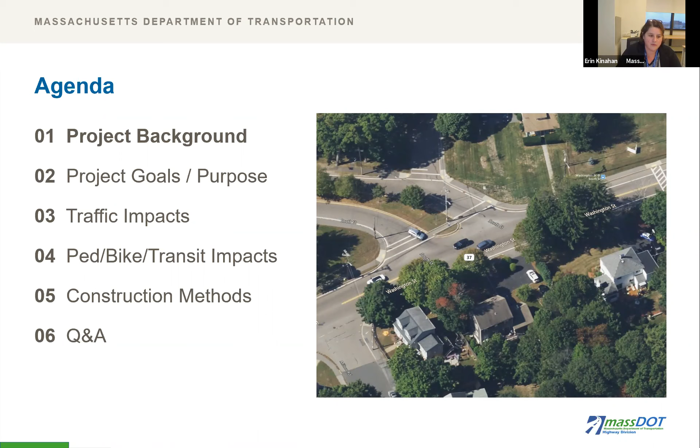Project background, how did we get here? Prior to 2020, we were aware of the existing operational safety and accessibility concerns for all users at this intersection. Discussions between MassDOT and the town of Braintree regarding safety improvements began in the fall of 2020, with the design conducted over the spring and summer of 2021. Hopefully this fall we will begin construction of improvements with new geometry and traffic signal installation.

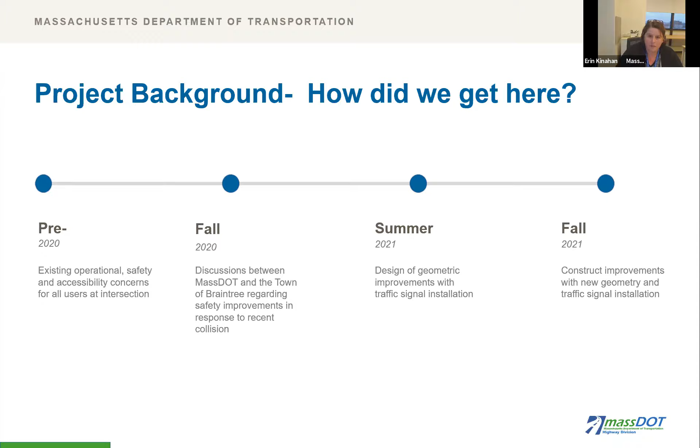Why was the project initiated? This project is a result of operation concerns that have existed in the town of Braintree for several years, as well as the desire to provide pedestrian accessibility improvements. Project purpose will include operational and traffic concerns, safety issues, and accessibility concerns.

What will be implemented? This is a graphical representation of the intersection improvements that we are proposing.

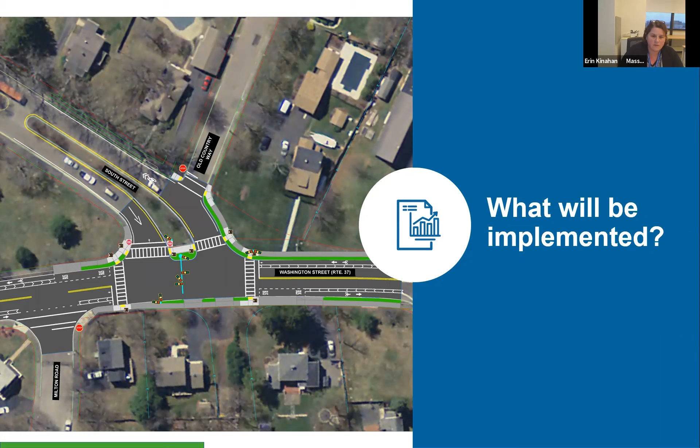Project improvements will include installation of a new traffic signal and ADA compliant pedestrian curb ramps. The project will also provide two dedicated signalized crosswalks across Washington Street, as well as a signalized crosswalk across South Street with a median island. Improved conditions, pavement markings, and signage for bicyclists within the vicinity of South Street. This project will result in improved accessibility for transit users with improved visibility of transit stops.

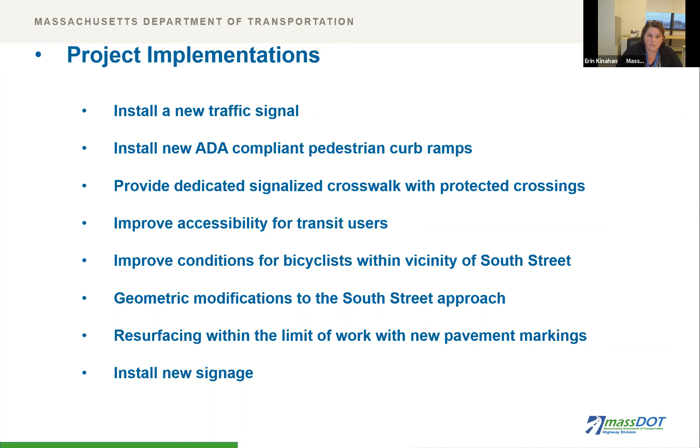Geometric modifications along the South Street approach will improve the overall safety of the intersection, and the existing pavement will be resurfaced with new pavement markings, and we will install new signage. The proposed improvements will be constructed within the existing right-of-way, and no takings will be required for this project.

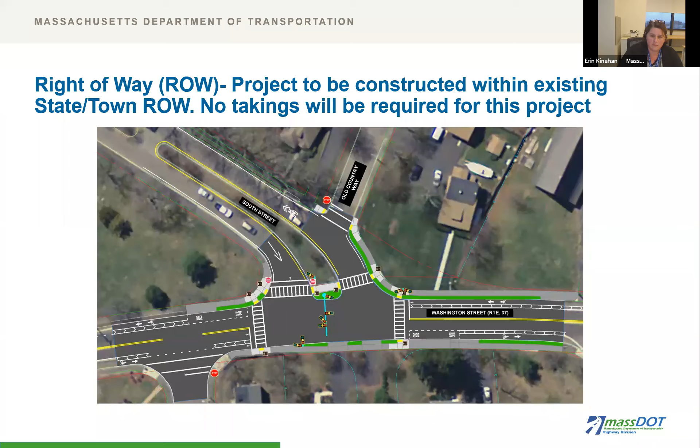How will the road user be affected? First, the traffic impacts will be that the new traffic signal will be built with emergency vehicle preemption. Vehicles from South Street will no longer need to wait for gaps in traffic along Route 37 in order to make a turn. However, Washington Street traffic will no longer have free movement through the intersection and will be required to stop on a red. Tightened intersection geometry will help reduce operational motor vehicle speeds, and the installation of new traffic signage should reduce driver confusion at this location.

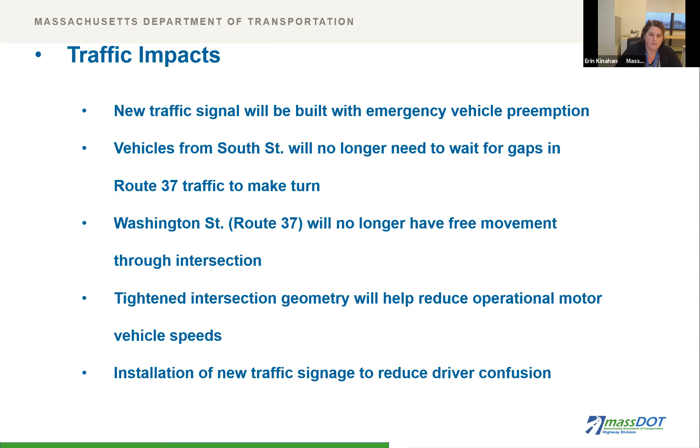There will also be pedestrian, bicycle, and transit impacts.

These will include signalized crosswalks that will be provided along the approaches of the intersection. Newly constructed ADA compliant pedestrian curb ramps will also be provided, and there will be proposed bike lanes along the project length on Washington Street within the limits of work. Relocating bus stops to make them ADA compliant, and the signal will also include transit priority for MBTA buses.

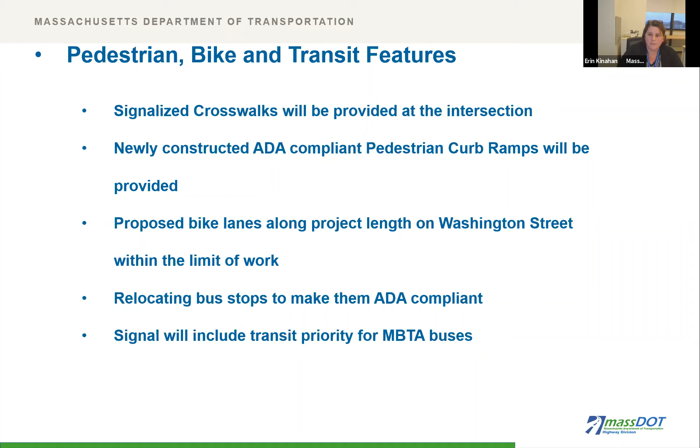What is the construction approach? MassDOT will begin work in the fall of 2021. Limited nighttime work is anticipated. Some daytime lane closures will be expected, and there will be increased traffic delay throughout the construction period.

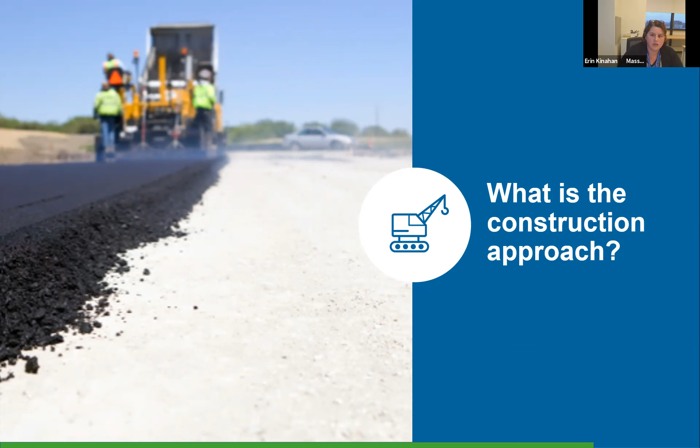And at this time, we are available to answer any questions that you may have regarding this project.